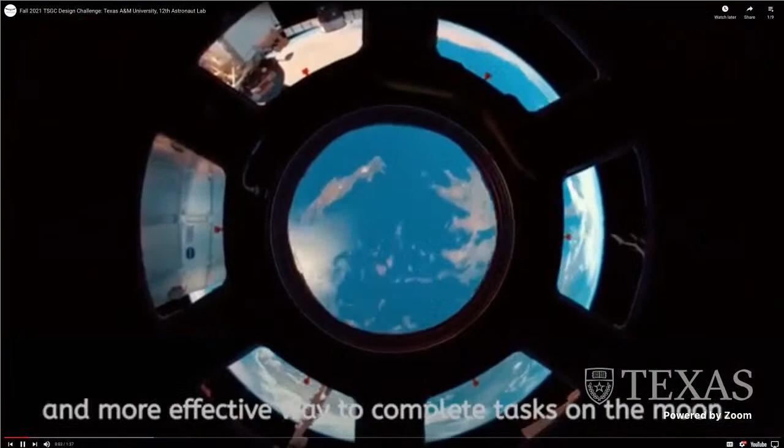Future Artemis astronauts are going to require a safer and more effective way to complete tasks on the moon. To address this, NASA issued the NASA Suits Challenge, encouraging students to improve astronaut extravehicular communication with augmented reality.

The 12th Astronaut Lab aims to develop and optimize a user interface that can be integrated into the extravehicular mobility unit of astronauts. Working with Microsoft HoloLens and Unity Game Engine, our team aims to bridge VR and AR technology in order to establish an alternative means of communication between intravehicular and extravehicular astronauts.

Our solution to the NASA Suits Challenge is Scout, an augmented reality assistant with an elegant user interface, navigation capabilities, a science sampling system, and the Telepresence Whiteboard.

Scout consists of floating hologram panels that display key vitals, task checklists, and settings to change font size, color, transparency, and feel of the system, which are all easily accessible via our main menu.

Scout provides an augmented reality compass and virtual markers to safely guide the extravehicular astronaut to points of interest. Lunarpedia serves as a virtual science sampling logbook, which the astronaut can use to save pictures and notes about anything that they find while in the field.

The Telepresence Whiteboard allows mission control and intravehicular astronauts to spawn holograms and drawings directly in the extravehicular astronaut's field of view, allowing for more interactive communications.

Lastly, our team is developing a robotic assistant to aid the extravehicular astronaut in reconnaissance by mapping out the upcoming terrain and sensing major obstacles or hazards. We are NASA Space Grant!

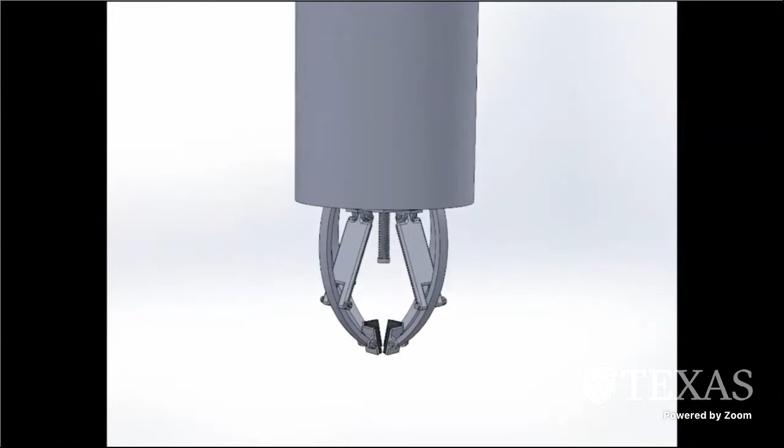The anchoring device has to comply with multiple criteria and constraints to qualify for the challenge, the most crucial being completely mechanically powered and the ability to produce 10 pounds of holding strength. In order to properly aid in EVA operations, the device itself must be lightweight and small enough to fit inside a cylindrical transportation device.

Once the lunar locker is removed from the container, the user can simply rotate the shaft handle counterclockwise to deploy the claw mechanism. Once a suitable location on a rock surface is found, rotating the shaft clockwise will close the claws to grip onto the rock surface.

Thank you for watching our video. We are NASA Space Grant.

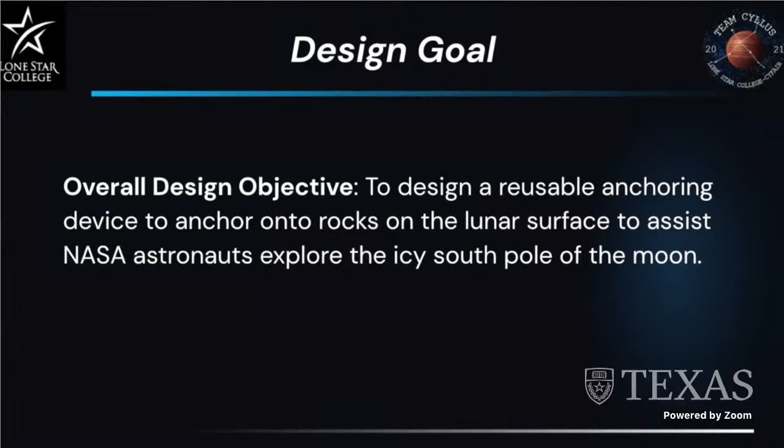The team's objective was to design a reusable lunar anchoring device for astronauts in the Artemis mission. This current prototype meets the requirement with its ability to anchor to at least a 12-inch diameter rock face while bearing angles to 90 degrees and maintaining a closing force of 10 pounds.

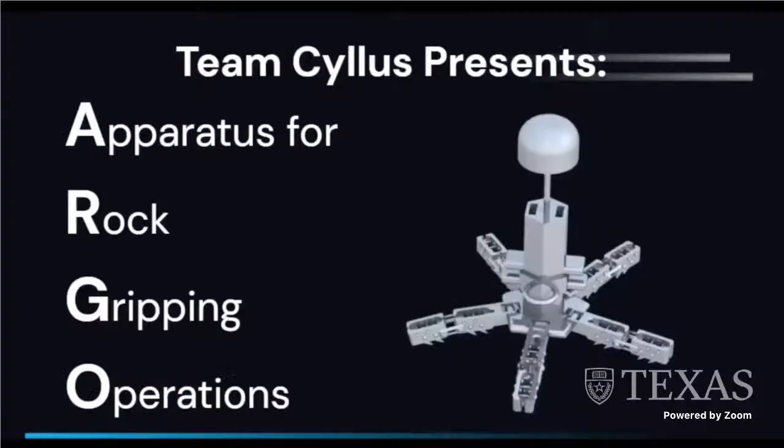In addition, it weighs 3.7 pounds, is compatible with EVA gloves, and can be manually operated with 1 or 2 hands. Argo, named for apparatus for rock gripping operations, is 17 inches tall and 5 inches in diameter. There are 5 segmented limbs with angled spines for maximum grip and hold.

Ice was a consideration in the model due to the ice exposure that would take place in the Artemis mission. The spines hook into the ice without penetrating the rock surface. In addition, the device will utilize a cable connected to the outermost end of the limbs and exert a contracting force which will curl the limbs inwards, much like the end of a finger, to anchor them to the rock.

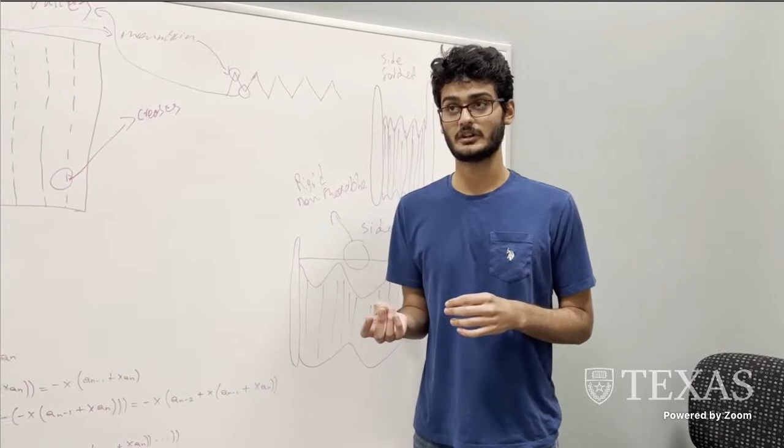Since the dawn of the space age, mass and volume has always been an obstacle to overcome in space exploration. As a team, we made our primary objective to optimize our design with mass and volume in mind to reduce mission costs. We did this with the art of origami, an ancient art that in recent years has been utilized as a vital tool in engineering and design. With origami, we designed a bed frame that is not only lightweight, but is incredibly strong, easily assembled, and mass producible. Starting with the first iteration of our design, we implemented the Miura-ori folding pattern into a small sheet of paper, and the structure could actually, surprisingly, hold a tremendous amount of weight compared to its own.

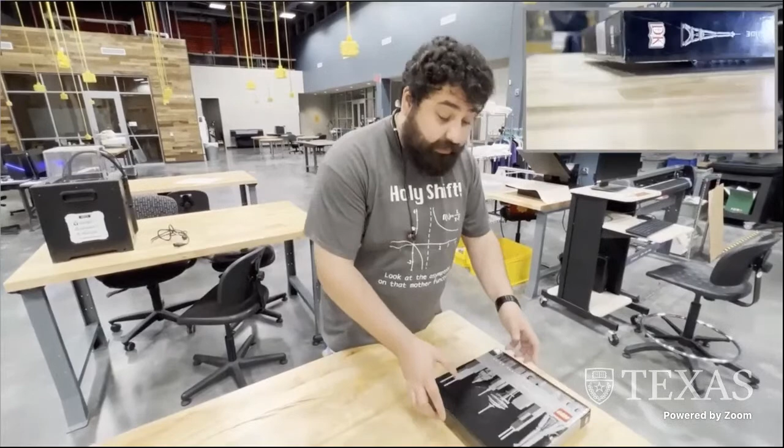We moved up to a scaled-up model version of the same pattern on the same material paper to understand all the complexity of this folding pattern, which we then implemented into our first prototype, built with the desired materials. Based on our prototype, we made several iterations for our testing phase. The calculated threshold was 40 kilograms, or 400 newtons.

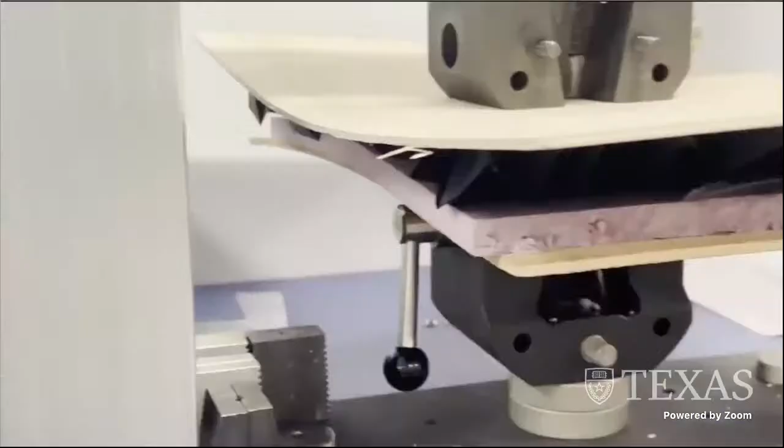We are NASA Space Grant.

Hello everyone, my name is Juan Pablo and we are Houston Engineering Center Group 5. I'm going to present the Vehicle Interchangeable Electronic Network System. Our design uses Arduino for all controllers, because it's easy to use, accessible, and affordable. The project simulates 4 vehicle applications: light, temperature, air pressure, and 3-axis acceleration. Each application has an LED to display the status.

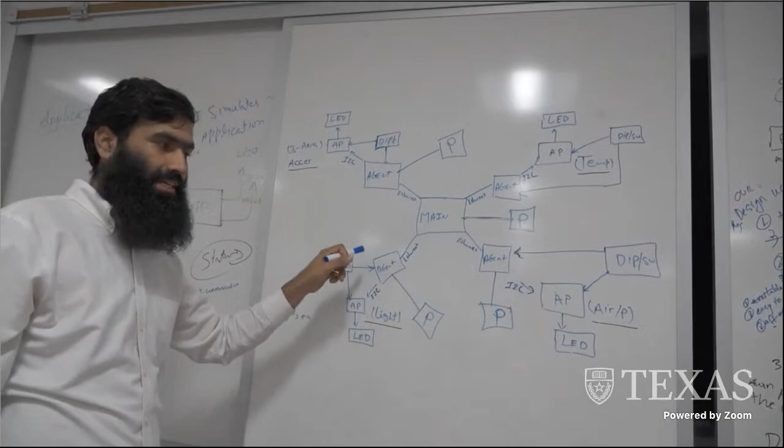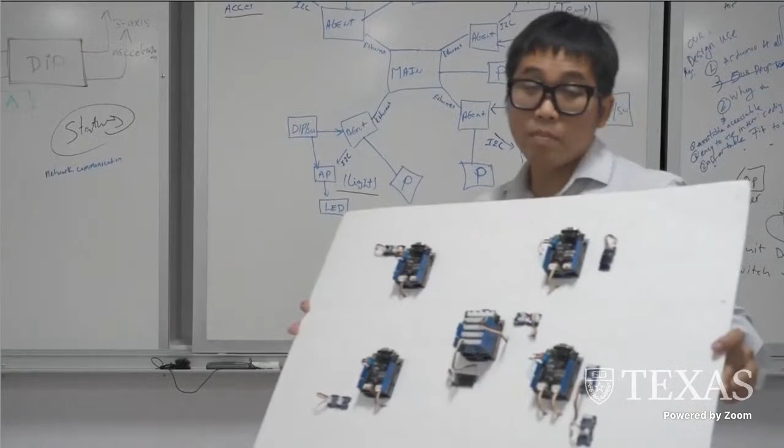For our design, we use a common connection for all units receiving power. A common 9-volt battery can power the controller. We made a backup for the network system: if one of the controllers fails, any other controller can replace it and behave according to the position. This is our design proof of concept. Our future plan is to make it fully functional and efficient. We believe this will be the best fit for the challenge.

We are NASA Space Grant.

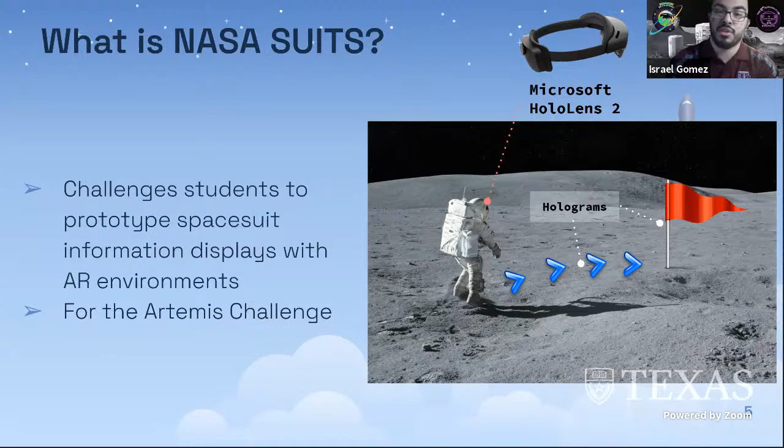Our solution to the NASA SUITS challenge is Scout. Looking at this design overview, Scout is designed into two main parts: our AR assistant and our robotic assistant. Scout's AR assistant informatics will display science instructions, vitals, terrain, and navigation instructions, which can all be manipulated in real time.

Scout's robotic assistant serves as a reconnaissance robot that creates a mesh of upcoming terrain via a LiDAR sensor in order to identify hazards and obstacles and route the best way to certain objectives. All of this is displayed and communicated via Microsoft HoloLens 2.

The mobile robot assistant is a telerobot that will aid the EVA crew member in navigation, reconnaissance, and science sampling. Our robot base is built off of a Yahboom G1 AI Vision Smart Tank robot, which features continuous tracks, Raspberry Pi, and real-time video transmission.

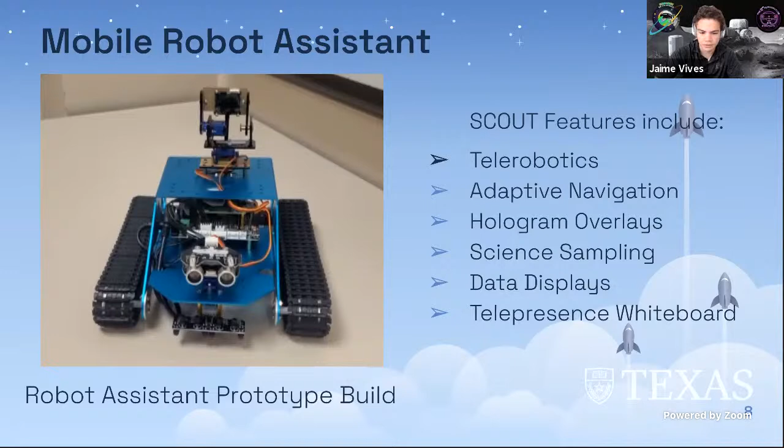The robot can explore dangerous areas and assist in search and rescue. Video feed can be supplied to mission control for better personnel support.

To further assist with navigation, we've created an adaptive navigation system, which involves the use of machine learning through Unity's ML agents. First, the surface normals are identified from the camera, and the crater boundaries are retrieved from a database, which are both input into the neural network for the agents to use. Then the agents utilize this data to create a suitable path to the current objective.

As seen in the video, the agents, marked in blue, are exploring the virtual lunar landscape and gathering data in order to provide a database for avoiding hazards, marked in red. Once the agents are sufficiently trained, they can be deployed to help assist in avoiding hazards and create a more efficient and safe path.

Another component implemented is our UI compass, and it interacts with its pointer to display the location of interest, such as a rover or lander, in relation to the EV crew member. The name and distance of the object is displayed overhead. The points rotate to indicate the appropriate direction of the waypoints.

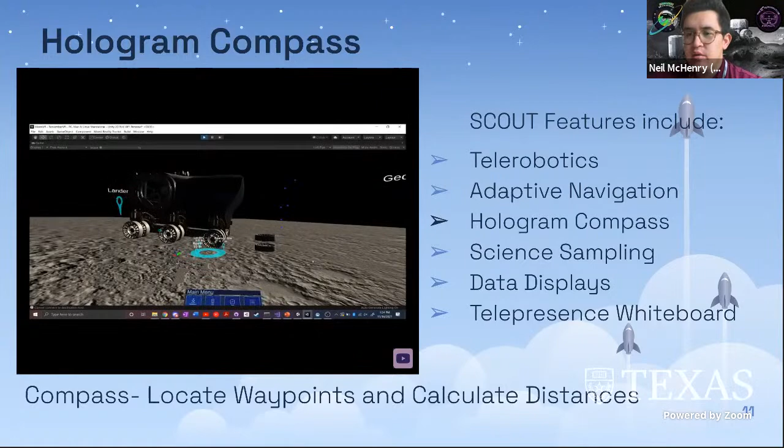As seen in the video, the user is selecting waypoints from the navigation menu to display on the compass. These markers can be set by the EVA or IVA crew members before and during the spacewalk. This compass serves to provide a sense of spatial awareness in bare environments such as the lunar landscape.

A feature we have for field note-taking is the Lunarpedia. The Lunarpedia note-taking system is used to create, store, and recall entry logs. The user can create an entry, add a picture and description using voice logs, and store its location as a spatial anchor, as shown in the top photo.

The Scout Assistant takes care of real-time voice transcription using the Azure Cognitive Services framework. Once the user saves the log, it is saved as an object in the Azure Blob Storage resource.

The user can also display and edit any previously created log and location, and the photo and description will be updated in the cloud storage, shown in the bottom photo.

Our user interface design features circular consumable level indicators that are updated in real time based on the telemetry provided by the spacesuit. It also has a Lunarpedia, which again can be used to record voice logs and catalog pictures of science samples and points of interest found in the field.

Our radial menu makes it easy to access any UI elements quickly through eye tracking and hand gestures. And lastly, the 3D Terrain Minimap provides a visual of nearby waypoints, crew members, locations, and hazards.

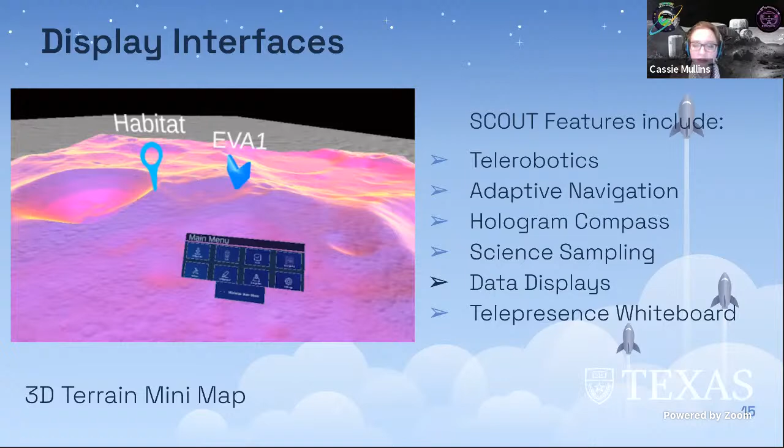Here is the Telepresence Whiteboard. The video on the left shows the view from the remote user or mission control. The video on the right is the view from the HoloLens 2 user, or the astronaut.

The remote user can see the scene that the astronaut is in using the LiDAR scan data. The position of the astronaut is indicated by the VR headset. The position of the remote user is indicated by the Scout AR Assistant icon, which looks like a Shiba Inu.

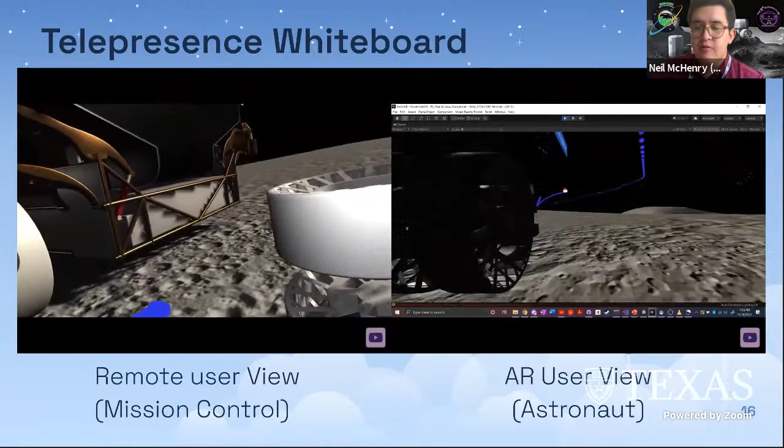Using the Photon server library for networking, the remote user can guide the EV crew member using the spline pen to draw on the EV crew member's field of view, as you can see with the blue drawings in the video. The remote user can also speak to the EV crew member.

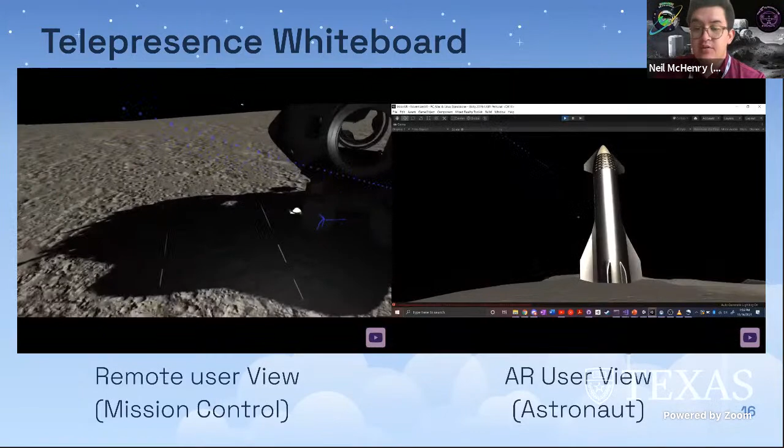Scout AR Assistant can suggest in real time to the astronaut crew member different recommendations of where to go and what to look at. Scout can also listen to and interpret voice commands from the crew member to change the UI display.

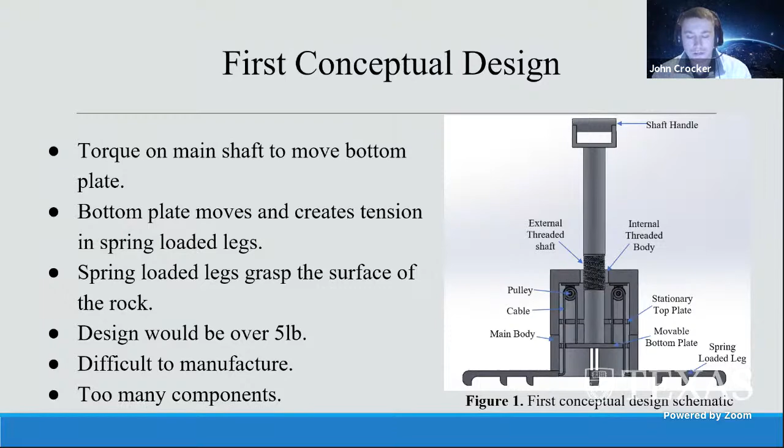Thank you, John. For our second design concept, we had the opportunity to attend a MicroG information session. During that session, it was described that the device itself could be used to grab onto the rock as if to lift it, instead of utilizing the face of the rock surface as seen in our first conceptual design. In the second conceptual design, it is still powered by torquing a threaded shaft component, and it allows a lead screw to traverse the shaft.

The idea for this concept is that the threads are self-locking, or potentially adding an additional locking mechanism so there's no back driving of the threads when it is locked onto the rock surface we're trying to attach to. I'm now going to pass it on to Bun to discuss our decision matrix.

Thank you, Hudson. In order to select the best conceptual design, a decision matrix was utilized to highlight the strengths of each specific concept design. NASA's InSight Mars lander space claw was used as a datum to compare with the given design concepts. Going through the matrix, it is shown that the second conceptual design was rated higher than the first conceptual design with the given criteria. With this breakdown, it was estimated that the second concept would be the better design moving forward.

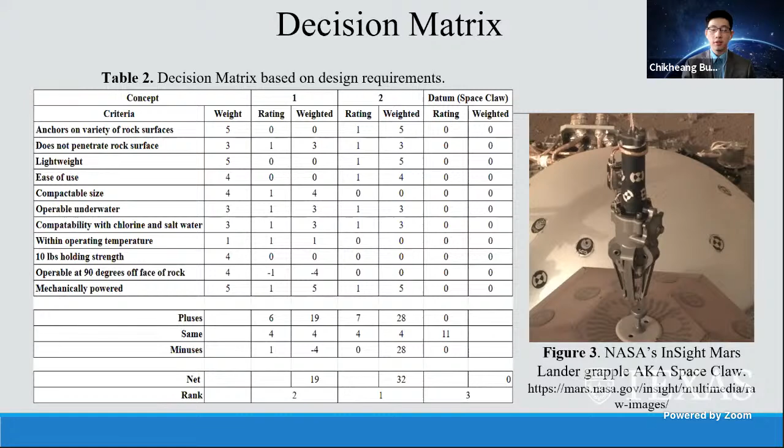Now I'm going to pass it to Hudson for the final design concept. Thank you, Bun. So our final design concept still utilizes the lead screw to generate linear motion, as previously shown in our second design concept. The lead screw is flanged to a bottom plate that will allow the legs of the claw device to open and close based on the linear motion of that lead screw.

The bottom of the claws have a rubber footing that will ensure there's no penetration and a strong grip can be achieved on the rock surface. The design shown is mostly based on the Micro-G Next design challenge, and it will potentially be tested in the neutral buoyancy lab, but there have been some considerations for use on the lunar surface, such as a rubber seal to protect the thread interface surface from any lunar dust.

I will now pass it on to John to discuss the material selection for our design. Material selection for our final conceptual design consists of 4 main materials: 6061 T6 aluminum, 304 stainless steel, 316 stainless steel, and nitrile rubber. The aluminum was chosen for the main components listed in Table 3, such as the strut, leg components, bottom plate, and stability handle.

The 304 stainless steel was chosen for the lead screw and threaded shaft, along with 316 stainless steel for the fasteners and strut hinge. Finally, nitrile rubber was chosen for the claw foot.

Nitrile rubber was chosen for the claw foot mostly because it has excellent abrasion resistance. Since lunar rocks are very porous, we didn't want our bottom material to break off, so we needed really good tearing resistance as well. We chose 6061 T6 aluminum for its strength to weight ratio, its corrosion resistance, and its rigidity for our design.

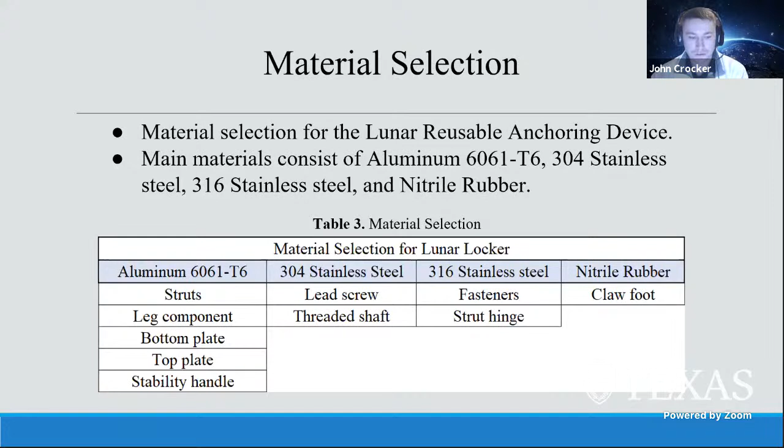For the material weight, the total weight for all components is listed in Table 4. Each component, its quantity, and its corresponding total weight can be seen. The total weight for all the components needed for our design was around 4.924 pounds. The total weight was evaluated using SolidWorks mass properties for each material and its corresponding component.

The total weight for all the components is cutting it close to the 5-pound constraint, so further building and prototyping will be necessary to ensure the device is within the constraints for Micro-G Next. I'm going to pass it to Hudson Hill for the clamp and thread analysis.

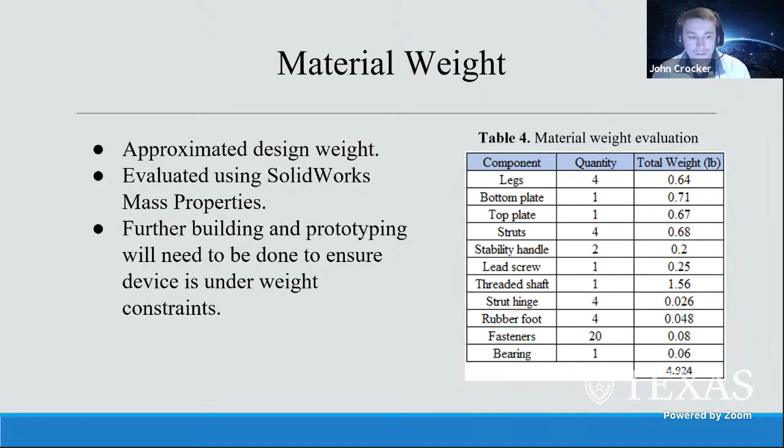So the first bit of analysis that was performed was to see how much force was required to generate the 10 pounds of holding strength needed for the claw device. This was done using MathCAD, and the calculations show that each leg is subjected to around 11 pounds of force.

This value can then be used in finite element analysis to ensure the structure of the device can be strong enough to withstand the desired holding strength, and this analysis will be performed at a later date for the structures.

The last bit of analysis was for the threads in the design. As previously stated, one of the goals is for the threads to be self-locking so we don't have to use an external braking system to hold the threads in place. The thread we chose is a 1 1/4 inch thread diameter with 4 threads per inch and 2 thread starts. A minimum friction coefficient of 0.15 for steel-on-steel thread interface was used in the analysis and shows that the threads, in fact, should be self-locking. Further testing will still be done in prototyping to ensure that these threads are self-locking and safe for the design we've chosen. I'm now going to pass on to Mustafa to discuss the project plan.

What's been done so far, as previously shown: the conceptual model has been designed and parameters have been evaluated, such as weight and material selection. Going forward, we will await Micro-G's final decision on the design selection. Should Micro-G choose our design, they will appoint us a mentor, which will help us immensely. We have to perform finite element analysis on the structural components, and we have to create our design prototype and evaluate its effectiveness. If there are any errors or issues we encounter with the prototype, or if it's not up to standard with the criteria and constraints, then we will make adjustments as necessary to produce our final working product.

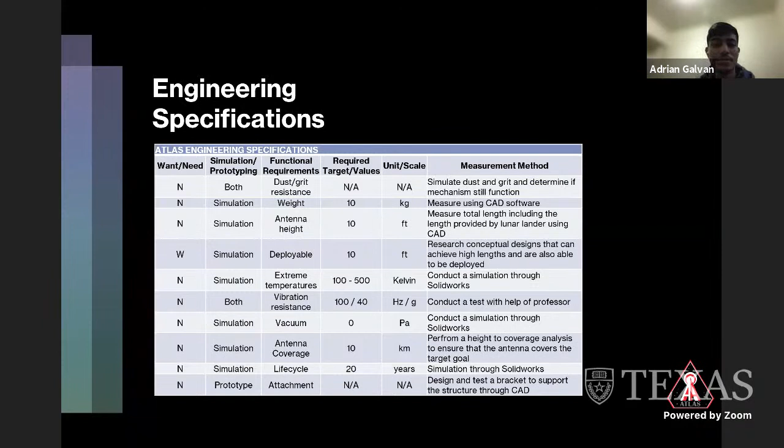Here are engineering specifications. It has some of the most important requirements we need to consider, such as weight, height, temperature, vibrations, and dust.

Going into more detail, it is expensive to send structures into space. It costs up to $1 million per kilogram to send something into space, according to our mentor. For this reason, we want to keep our weight to a minimum. Our team aims to keep the total weight under 10 kilograms.

Another thing to consider is the extreme temperatures on the moon poles. The temperatures there range from negative 280 degrees to positive 260 degrees Fahrenheit. So we need to pick a material that could withstand these temperatures.

In addition to extreme temperatures, we must consider significant vibrations that could affect the structure during launch and landing of the lunar lander. Therefore, our design needs to have the structural integrity to withstand these vibrations.

How we would attach the antenna bracket to the Nova-C was also considered. The Nova-C has a solar panel structure on top, so we determined that we would need to attach our structure on the side panels.

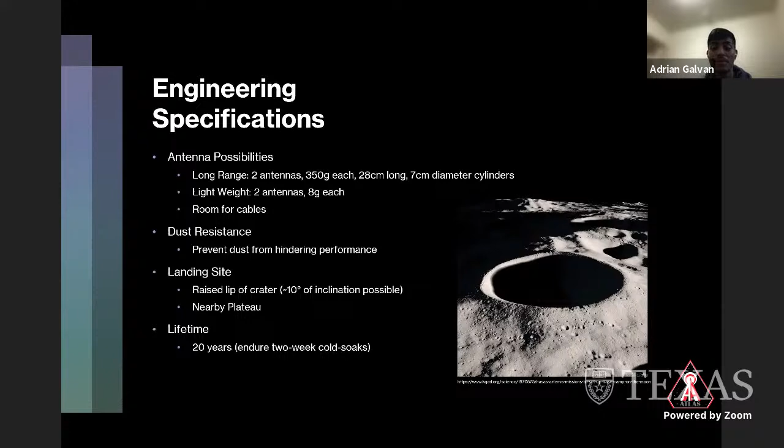Moreover, the landing site will be in a raised lip of a crater, and there's a possibility that the lander lands on a 10-degree incline, so a mechanism is needed to adjust the antenna if the lander does not land straight. Finally, we will need to accommodate for a 20-year lifespan and endure 2-week cold soaks.

For our conceptual designs, we came up with 3 deployable variations: a telescoping boom, a composite boom, and a triangular truss. The telescoping boom is composed of multiple hollow tube sections that are initially stowed and deployed one at a time. This is done by an electric motor that sets a system of pulleys in motion. This concept provides great structural integrity.

Then there's the deployable composite boom that is very much like a measuring tape and is made out of composite materials. The boom contains strips that are either glued or welded together and shaped in the form of a cylinder.

The motor and boom are housed in the same space that leads to a tubular opening from which the boom deploys. Lastly, we have the deployable triangular truss, which consists of metallic wires that uncoil from the base of the structure by a motor and turntable. This design offers a compact storage volume that occupies less than 50% of the total deployed length. Since it's foldable, the joints have multiple degrees of freedom, while the truss structure offers structural support.

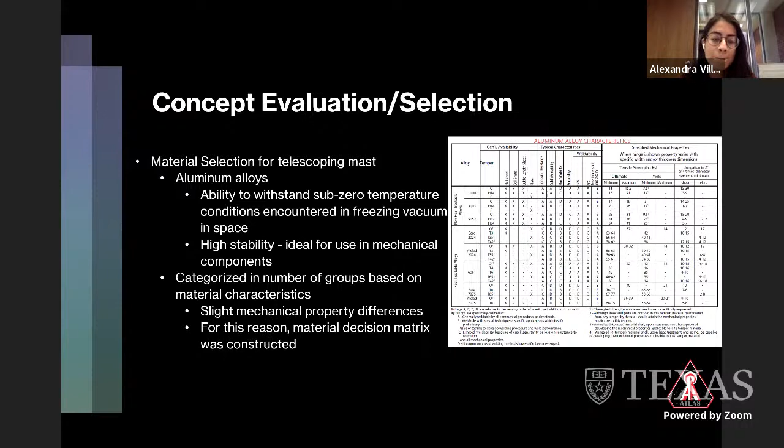The pulley system is how the mast is going to get to its deployed position. We studied countless other deployable masts of all types and came up with this simple lightweight option that gets the mast to its desired height. A force analysis yielded a torque value of 0.48 Newton meters for our motor, and the Nippon Pulse stepper motor met our criteria.

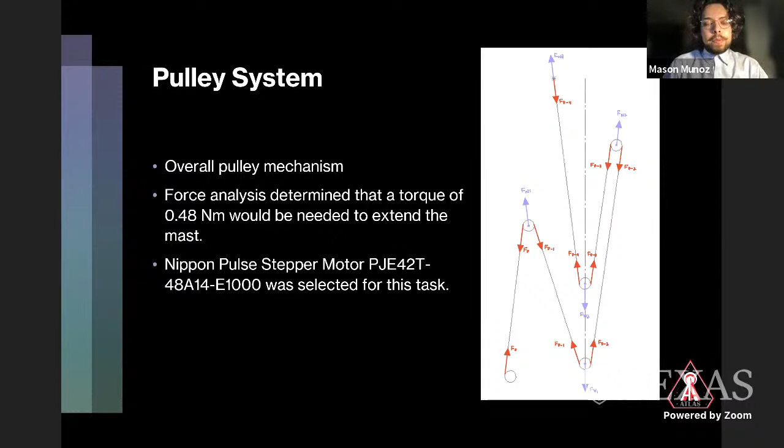A preliminary radio link design was performed with the help of our mentor to determine a rough estimate of the required antenna EIRP for varying tower heights. While our antennas were roughly picked out for us, this model may be useful in the future to determine other alternatives.

Mr. Lansdowne also helped us pick out a suitable cable by comparing their masses and insertion losses. From his research, the UFJ 205A and UFJ 185A were both good candidates to use. The cable selection is important in our project in determining the maximum range of the antenna, as well as a more accurate load for the buckling simulation, as we'll see in the future.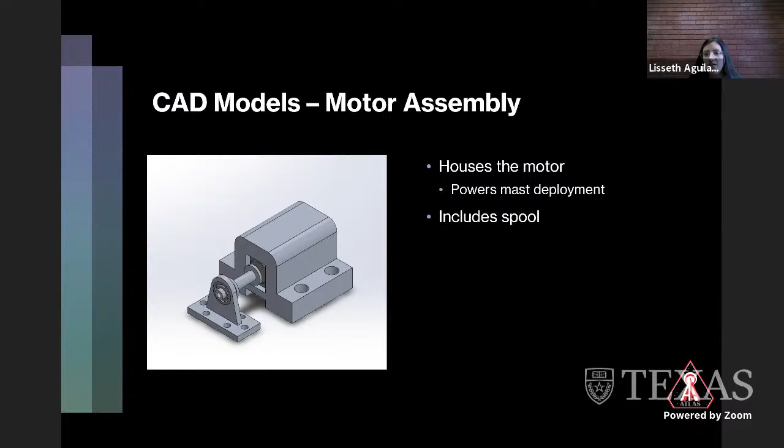In order to make sure the structure would be able to withstand the top load, we conducted a buckling simulation using gravity and an estimated weight of the antenna and an auto-adjusting mechanism we're planning on doing as the loads. The following results were obtained, and since the load factor is considerably larger than 1, the mast will not buckle.

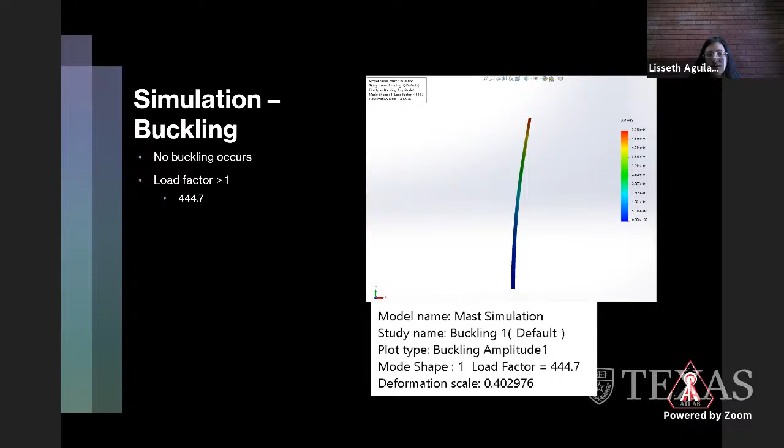Some potential obstacles that may be faced when landing include an uneven landing and abrasive lunar dust. Fortunately, the Nova C lander has an approximate 10-degree tilt recovery, but in order to maximize the antenna range and efficiency, we plan on adding a gimbal at the top of the antenna mast for stabilization. Furthermore, in order for the deployable structure to be free of lunar dust, we have added a casing around the mast, and we will design a lid on the top.

In the foreseeable future, we plan to prepare our CAD models for manufacturing, then building and testing our prototypes. Our prototypes will be made of the selected material, aluminum 6061, and we will perform vibration tests. Finally, we will design and program both the gimbal and lid to deploy once landed.

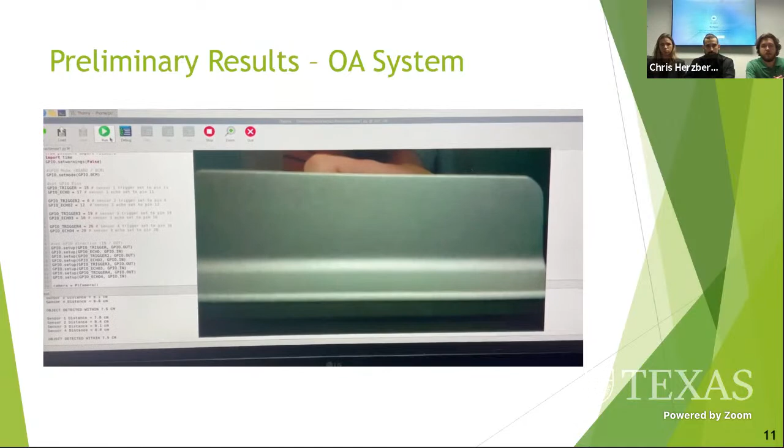When the object is reaching a little bit closer, within that 7.5 centimeters, the message has been given multiple times. It's just showing the object moving a little bit further away, not displaying those alerts anymore.

Starting next semester, we plan to have everything completed as far as the individual systems are concerned. We will begin integrating all the systems together, and then we will start our machine learning, and we hope to have that completed by March 24th, giving us some wiggle room to troubleshoot and handle any issues that may come up, and be done by May 7th.

In conclusion, the progress so far: all our diagrams and documents have been drafted and completed. The system's GUI has been designed and coded. All of our parts have been received, and we're in the progress of putting them all together. The only things we have left after that are to integrate the systems and begin the actual machine learning implementation.

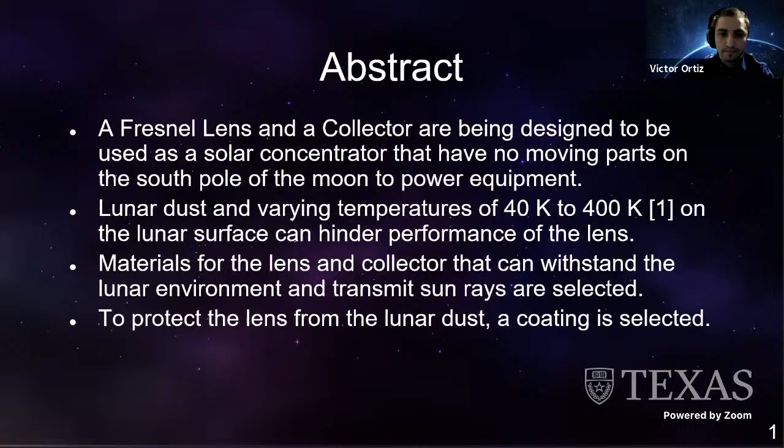For this project, the teams involved are Team Hyperion, whose roles are to design the dimensions of the lenses and collectors, simulate the lenses and collectors for optical and thermosolar flux in both lunar and Earth environments, and test prototypes for optical solar flux to validate the simulation. For Team Solis: material and coating selection for lenses and collectors, fabrication of lenses and collectors, fabricate the testing bench, and test prototype for thermosolar flux to validate the simulation.

This design is ideal to be placed on the lunar surface to concentrate solar energy. However, to simplify this process in simulation and prototyping analysis, the design is to only have a 30-degree revolve piece of the lens. This will allow the simulation to run at optimal levels while also allowing for prototyping of the lens within the means of our manufacturing capabilities.

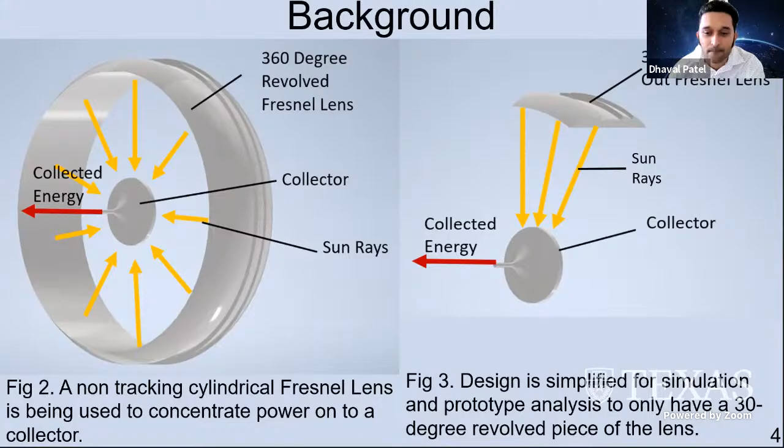For our objectives, Team Solis will go through the following: material and coating selection that can withstand the lunar environment, fabrication of lenses and collectors by producing two sets of two lenses and a collector from selected materials. Afterwards, polish all the lenses and collectors that have been fabricated, and then apply a selected coating to one lens from each material set. The next objective is to fabricate a testing bench that can hold both the lens and collector in position to mimic the simulation.

For our specifications, the first is a melting point of selected lenses and collectors that will need to be at least 400 degrees Kelvin due to the high temperatures of the moon. Furthermore, the material of the lens and collector must have a refractive index close to 1.4 to collect most of the sunlight, and it is imperative that the materials have a high transmittance factor of at least 80%, since the sunlight needs to be transmitted to create energy. Finally, the design of the lens and collector must withstand at least 9 Gs to survive a rocket launch. Similarly, our coating will also need to have the same melting point, transmittance, and refractive index criteria.

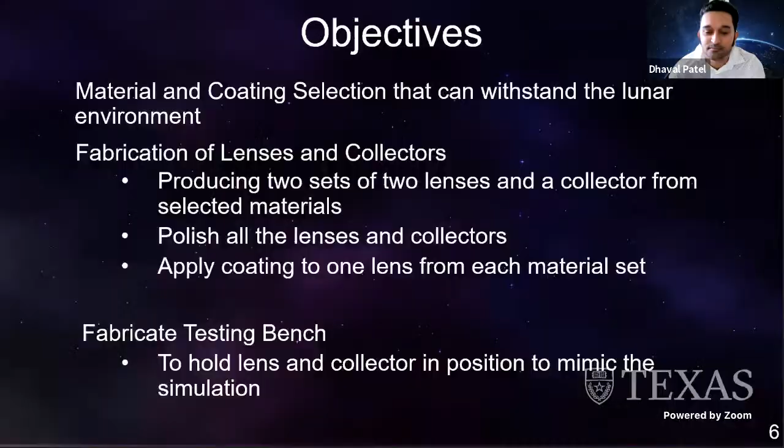These were chosen based on refractive index, transmittance, melting point, as well as availability and manufacturability. The lens will need a coating to protect from abrasive lunar dust, which will degrade the lens and decrease optical performance. Our team researched and compiled a list of coatings that meet the criteria mentioned earlier.

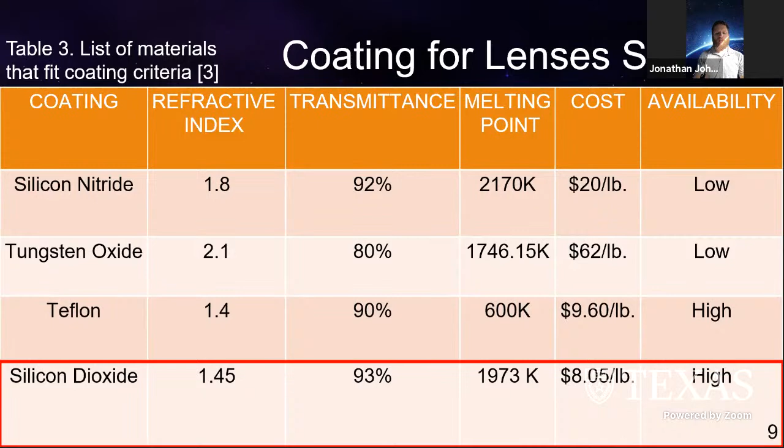We chose silicon dioxide due to being able to be simulated in Optica EM, its market availability, and being able to process it safely. For our fabrication method, we chose to machine our lenses and collectors. A 2-inch thick sheet of polycarbonate and PMMA were selected, thick enough for our prescribed dimensions of lenses and collectors to be produced.

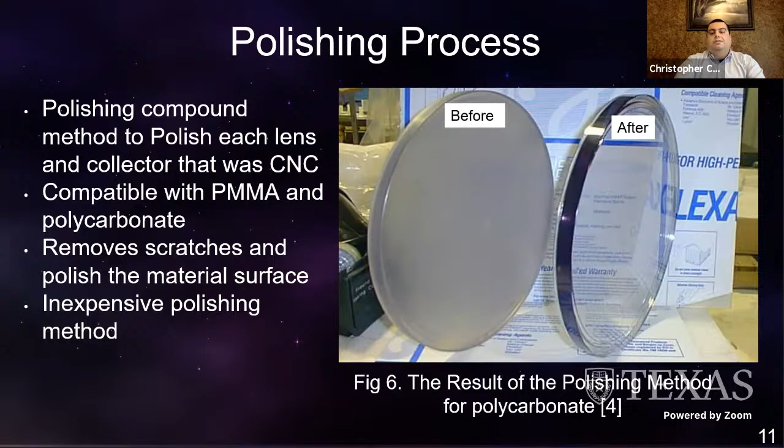After the CNC process, the lenses and collector will need to be polished. This is to ensure there are no scratches or imperfections from the CNC machine process that can interfere with the clarity and light transmissibility when testing both lenses and collector. Therefore, a paste compound polishing method is being chosen since it can be applied to both PMMA and polycarbonate materials, increasing surface finish and smoothness as shown in the figure.

We have designed a test bench that mimics the simulation in terms of position for the lenses and collectors, where light will pass through the lens and focus on the collector. The test bench has a revolving shade that shields the collector from ambient light, which eliminates a factor when assessing the lens's performance.

The test bench has a pivot armature that can raise and lower the lens to have its focal point line up with the collector's center. The pivot armature also rotates with the cylindrical shade to point the lens towards the sun.

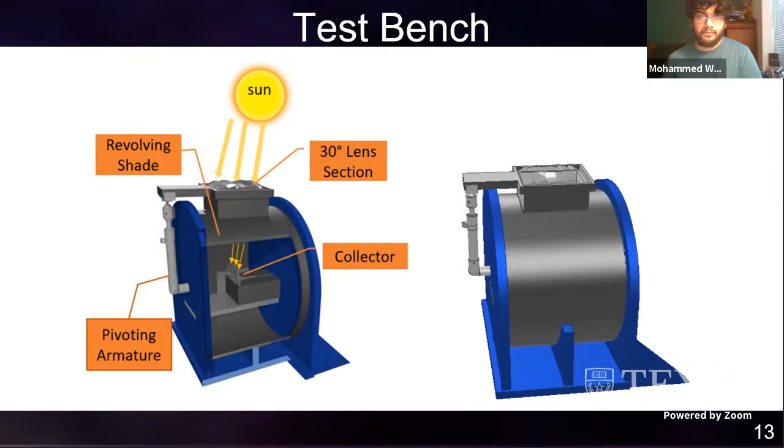This is the bill of materials for our fabrication of the lenses and collectors and testing bench components, as well as the safety wear we will use when conducting our testing.

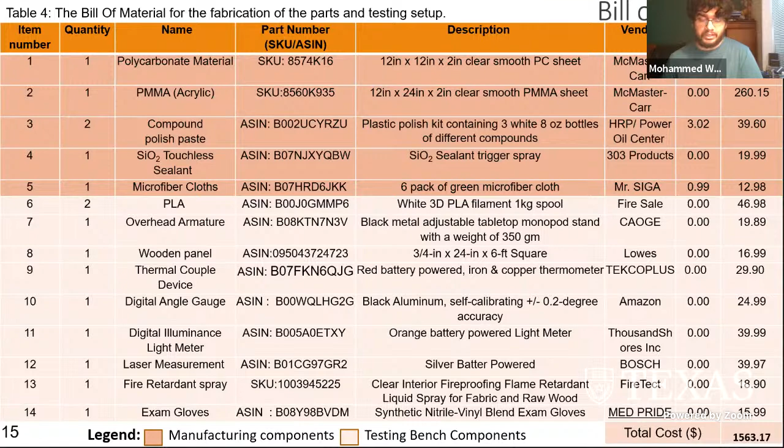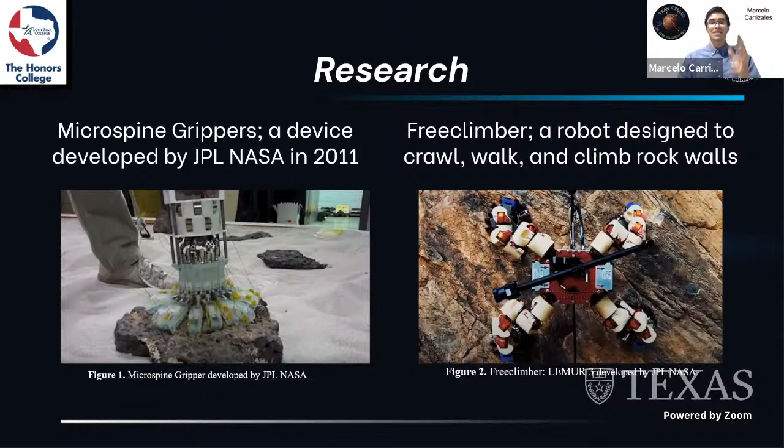Moreover, Team Silas has also looked at the Freeclimber Lemur 3, also designed by NASA and utilized for terrain exploration, which uses a similar gripping mechanism to the Microspine Gripper. With its thousands of hooks, it latches onto the rough surfaces of rocks. Team Silas is drawing inspiration from this design technology to create an anchoring device which is easily portable in size and weight while maintaining or even improving its efficiency. Next slide please.

Through the engineering design process, Team Silas has addressed the design criteria provided by NASA Micro-G throughout development. Team Silas seeks to develop a device which is adaptable to different rock types, cannot penetrate the surfaces of the rocks but can mildly scratch them, and is operable with one or two gloved hands.

The device must have a 10-pound holding force and a dry weight of less than 5 pounds earth weight. It must also be adaptable to icy surfaces since the lunar temperature creates an icy layer around the rocks. The device must be storable within a 6-inch diameter by 18-inch high cylinder, and we will address minimizing pinch points as much as possible.

Thank you, Marcelo. After reviewing our research and the design criteria based on NASA requirements, the team proceeded to come up with preliminary designs. We came up with Grabber and Argo, which stands for Apparatus for Rock Gripping Operations.

Structurally, the two designs are very similar in two ways. One, both designs have segmented limbs which help with extending or contracting and grabbing onto rocks of many surface types. In addition, the limbs have microspines which help strengthen the gripping onto the rock. The designs, however, are different mechanically.

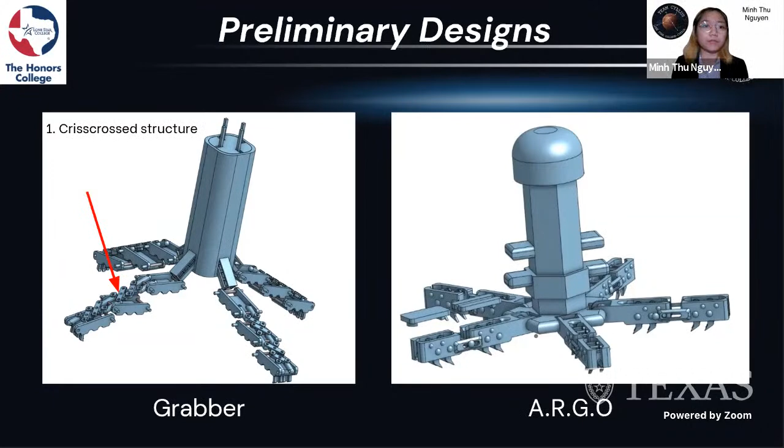Grabber relies solely on crisscross structures located on its limb to be fully functional. Argo, on the other hand, has a cable system as well as torsion springs that significantly help with applying force, grabbing, and gripping onto rocks. Later in this presentation, we will show a better view of the cable system and torsion spring to give a better idea of our design.

After coming up with the preliminary designs, the team compared our designs to select the one we would like to continue working and improving on. Since the Microspine Gripper was a design we drew inspiration from, we decided to use it as our datum and compare Grabber and Argo against it.

In terms of anchoring ability and holding strength, Grabber underperformed compared to our datum. Argo, on the other hand, meets and exceeds the features of our datum and earned a much higher score compared to Grabber. Therefore, we decided to move forward with Argo.

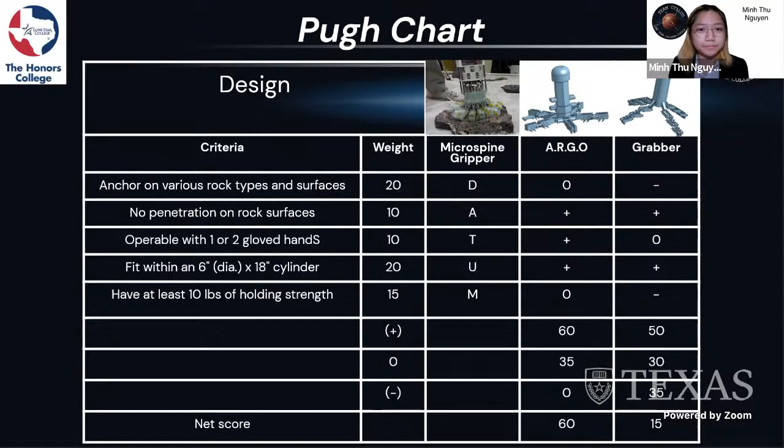The Argo design is a compact lunar anchoring device weighing 3.7 pounds as calculated by our SolidWorks software. It is 17 inches high and 5 inches in diameter in its resting position, reaching a maximum of 13 inches in diameter when being operated.

The design consists of 5 segmental limbs kept in constant downward force through the use of torsion springs at the base of each limb. The limbs will be raised to their anchoring position by compressing the handles of the outer ring and central ring together. Each limb segment contains 4 independently actuated spines designed to lodge into defects on the rock surface with only mild scratching, which is allowed per the Micro-G challenge.

This is a better image of the cable system along with our torsion springs. The spines are locked in place with force provided by a linear ratcheting system connected to a cable system going from the outermost segment of the limbs into the bottom of the central housing.

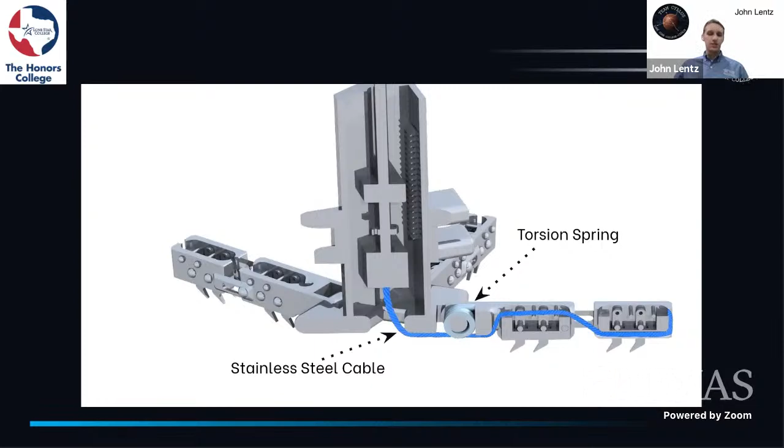The tension will be kept on the limbs as the astronaut extends the topmost handle upward, contracting the cables going through the system, providing a gripping force much like the end of a finger.

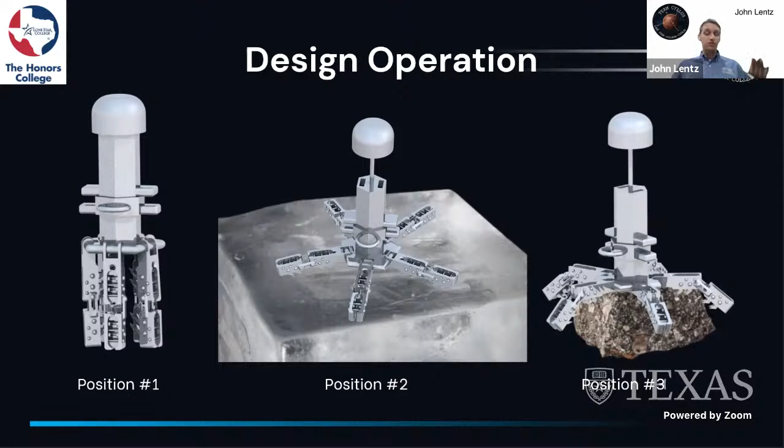On the left is the Argo device in its resting position. To operate the device, the handles of the central housing and outer ring are compressed, raising the limbs against the downward portion of torsion springs, resulting in the middle image. The device is then placed against the rock surface, and the limbs are released from their holding position, contouring to the surface. After which the handle on top of the device is extended, contracting the cable system, causing the spines and limbs to grip the surface, allowing the device to anchor onto both flat and curved icy surfaces.

The team has made a small-scale mock-up of the Argo design to test proof of concept. By designing the smaller scaled mock-up, the team gained a stronger understanding of how the limbs should interact in the model and visualized the cable system within this design. This mock-up has given the team insight into how the Argo design could be multifunctional for picking up smaller rocks on the lunar surface.

Did I just cut out? Sorry. I'm sorry, here we go.

This mockup has given the team insight into how the Argo design could be multifunctional for picking up smaller rocks on the lunar surface in addition to anchoring, exceeding the requirements given by NASA. Moving forward, the team will be 3D printing several prototypes for reiterations to improve the design. The team will be addressing in future work the possibility of pinch points and dust tolerance. The material we have chosen to manufacture the device out of will be aluminum 6061 for the body and stainless steel for the cable.

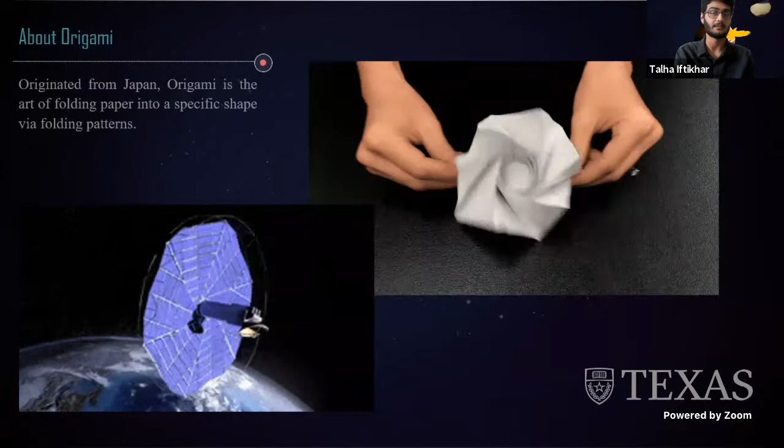Now, a little bit about origami. Origami is the Japanese art of folding paper into decorative shapes and figures. Depending on the folding patterns or the material used, structures can be folded to deploy automatically or form rigid columns that can support mass. In recent years, origami has had many applications in engineering and design. Its folding capabilities have been utilized by NASA in space exploration, such as in satellites, and it has the capability to significantly reduce volume and mass consumption.

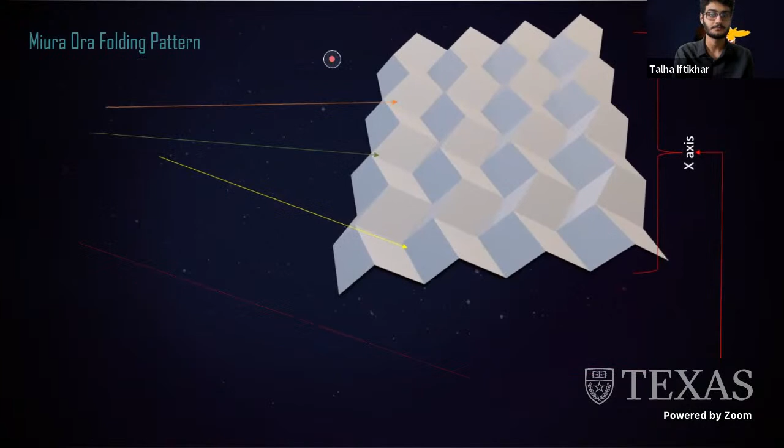The Bedogami design utilizes the Miura-Ori folding pattern for its structural stability, a pattern invented by Japanese astrophysicist Koryo Miura. The team chose this pattern due to it utilizing parallelograms to form the tessellation of the forms, making it a rigid origami mainly comprised of alternating mountain and valley folds. The simplicity of this folding pattern allows for assembly in a single motion, therefore reducing the amount of manufacturing parts to only a single foldable structure.

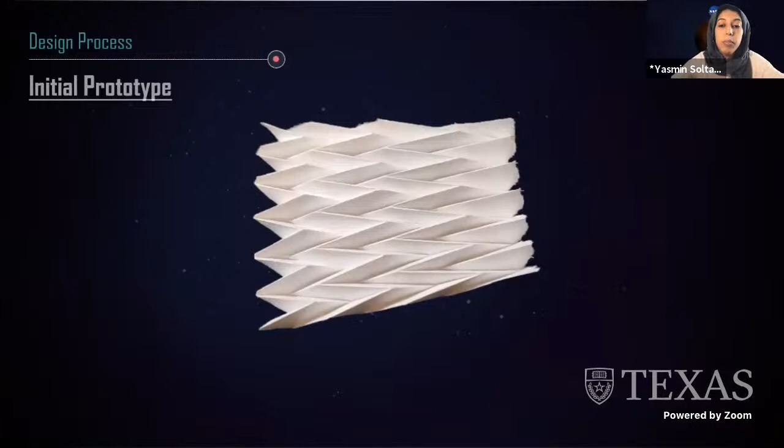The first folding the team made using the Miura pattern was made on a regular sheet of paper, which turned out to be extremely resistant and capable of holding a calculus book of over 1,300 pages. The team then moved to develop an upscale prototype of paper, which was essential to gain familiarity with the folding process. Once they acquired better knowledge of folding and origami from the upscale version, the team proceeded to apply the folding onto the desired materials, leading to a final prototype made of heavy weighted paper of 49 grams, which was then used for the testing process.

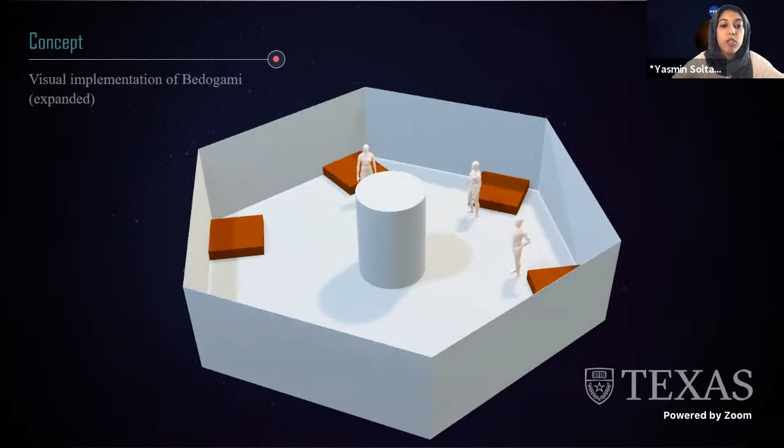This is a visualization of how the Bedogami would look once expanded. And this is a visual representation of how the Bedogami looks when contracted.

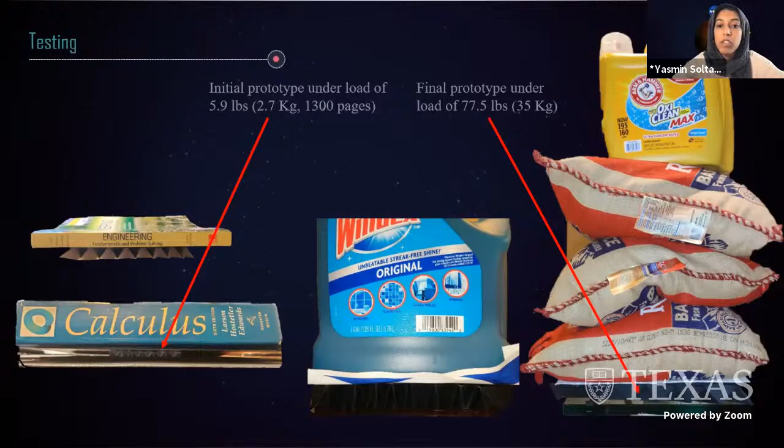Throughout the development of the Bedogami, the team conducted several strength tests on each prototype using mass objects ranging from heavy textbooks to rice bags and detergent bottles, using the compressive strength test machine at the UT Tyler Mechanical Engineering Lab. To calculate the stress within the elastic limit of the origami, we use Hooke's law.

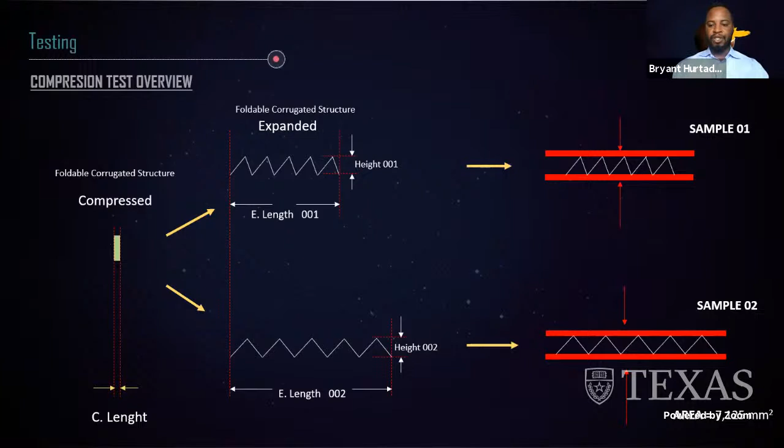We conducted 4 tests for our design, 2 for calibration and 2 for data collection. The origami structure test sample is half the size of test sample number 2, which is a full-size prototype, with the test overview shown in this diagram. In this image, we measure the total area of the mechanism compression machine.

In conducting the stress and strain curve tests, we briefly evaluated the effects of angle variation on the mechanical properties. For example, on test number 1, our raw data graph was obtained from the compression test, indicating a force of 620 newtons, with a calculated yield stress of 87,000 pascals and an elasticity of 241,000 pascals.

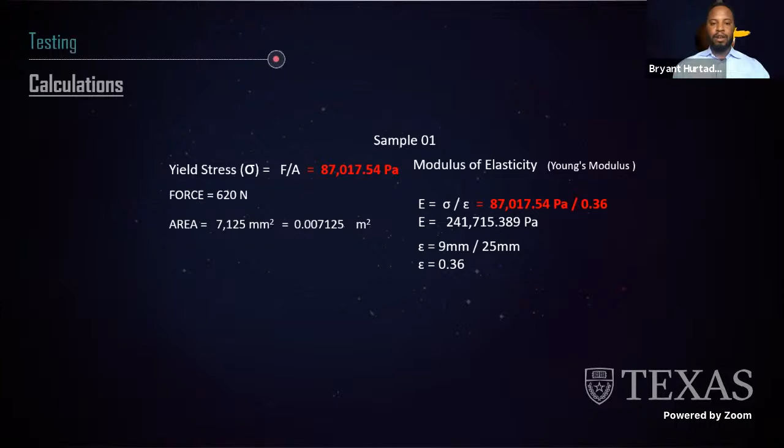We believe the future of our project to be fruitful. As we near the end of the semester, our team and fabrication personnel have already started implementing a new variant of the folding pattern, and we also plan to venture into the realm of compliant mechanisms to integrate them into our design. Our team is also working on different applications of our product, and most importantly, the concept itself, to serve the good of humankind.

Applications such as disaster-stricken areas in need of shelter and beds, and field hospitals, are just two examples where lightweight structures that are deployable from such small volumes can play a major role in emergency operations.

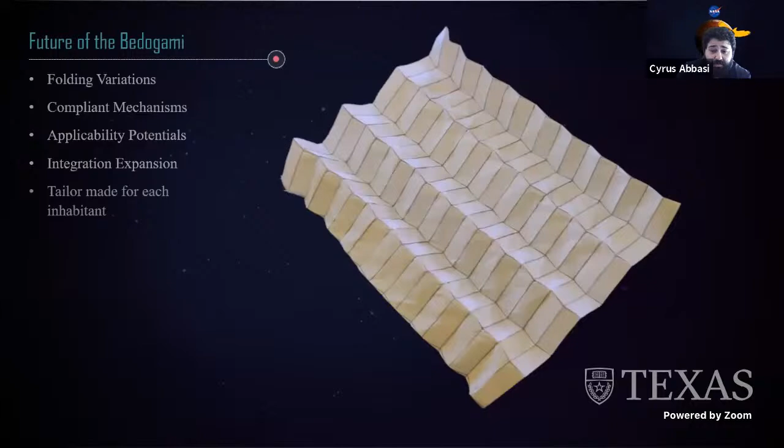This is our new variant that has 3 times the height and 3 times the load capacity compared to our very first small prototype. Just incredible.

Our project and proposed concept brings tremendous savings for future NASA missions, not only to Mars, but even for the upcoming Artemis missions.

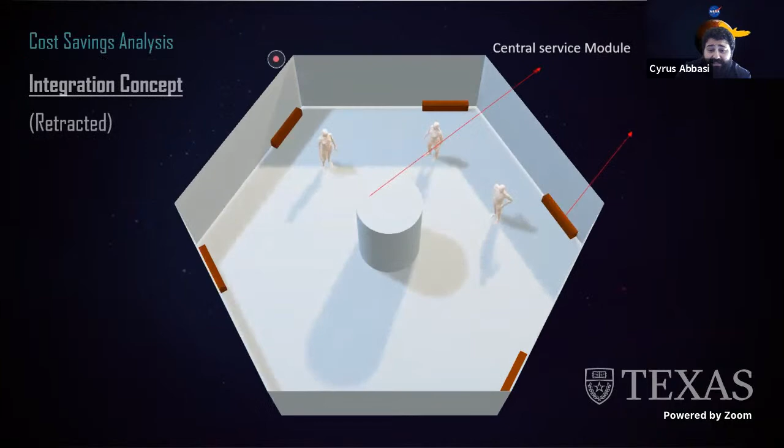We visualize the habitat quarters as seen in this concept 3D model, where we saw it best to have all HAB utilities based at a central column within the module. Usable space becomes very restricted when furniture such as beds and the HAB are not retractable, but with the implementation of origami, our design allows for twice the usable space, which can be utilized for other means.

Due to the retractable nature of our design, our beds are safer and easier to launch in the fairing of rockets, as they can be secured much better due to their lightweight and shape. This allows for transportation of more equipment in a single launch, dramatically reducing cost in both launch vehicle and module design, manufacturing time, manpower, overheads, parts, testing, certification costs, mounting, and fuel, delivering our initial proposed goal of dramatically cutting costs by means of volume and mass reduction.

We achieved all our objectives by implementing origami to reduce mass and volume, eliminating multiple launches needed to ship the excess mass originally, creating a simple design that assembles and deploys easily, and is tailored to every astronaut's physiology, to make space exploration cheaper and more accessible, feeding the explorer and pioneer nature of our species to go beyond. Thank you.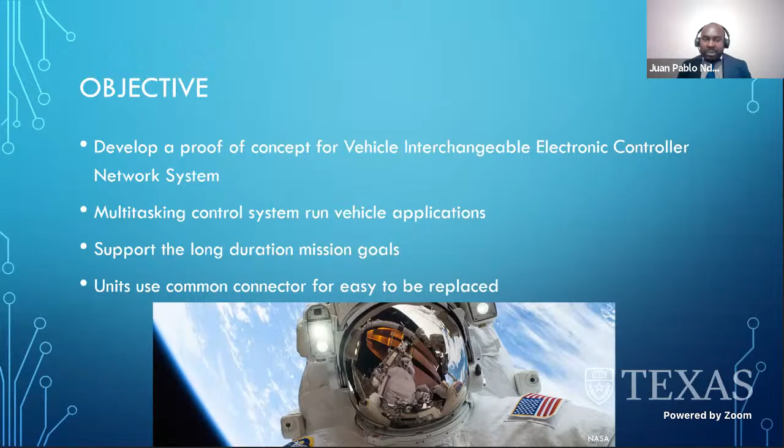Our objective is to develop a proof of concept for a vehicle interchangeable electronic controller network system that makes multitasking control systems run a vehicle application to support long duration mission goals, using common connectors for easy replacement. And the next slide will be presented by my partner Ingrid.

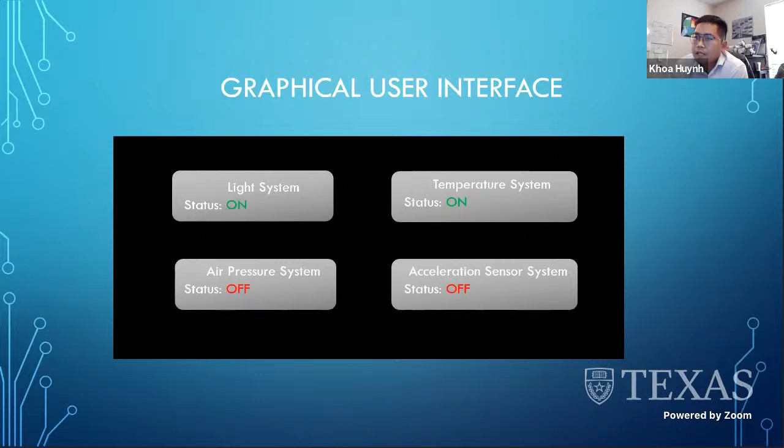Next slide will be my partner, Khoa. The graphical user interface is designed to monitor all the status for agent controllers, on and off.

We had a chance to put our design into a mock-up prototype. Here's our server, and around it are the agent controllers, and all the wires we run underneath, utilizing common connectors to plug in for all the same units.

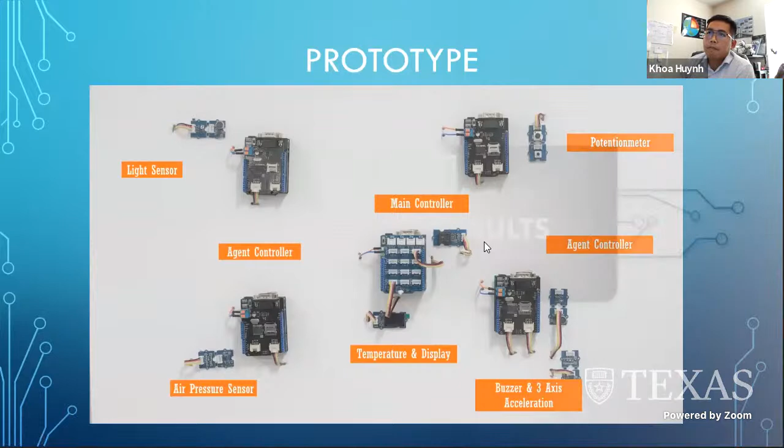Thank you, Khoa. Hello everyone, my name is V. Our preliminary experimental results were conducted by simulation on Tinkercad. The code was used to run the sensor system using an Arduino Uno R3 as the main controller, and the LCD screen showed the measurement from each application. The LED indication system is utilized to update the status by receiving data from the agent controller with green and red LED lights.

The first application is the temperature sensor system used to measure room temperature. The red LED illuminates at an average of 100 degrees Fahrenheit, and the green LED illuminates at an average of 75 degrees Fahrenheit, after 25 trial testing.

The air pressure application detects air quality and measures pressure levels. When the pressure is moderate or high, the green indication lights up, and when pressure is low, the red indicator turns on. The testing was repeated approximately 30 times.

The light-induced LED sensor system is used to measure light intensity, and the brightness level influences the LED indications. After around 25 attempts, whenever there is strong light intensity of 10, the green LED turns on, while the red LED indicates dim light.

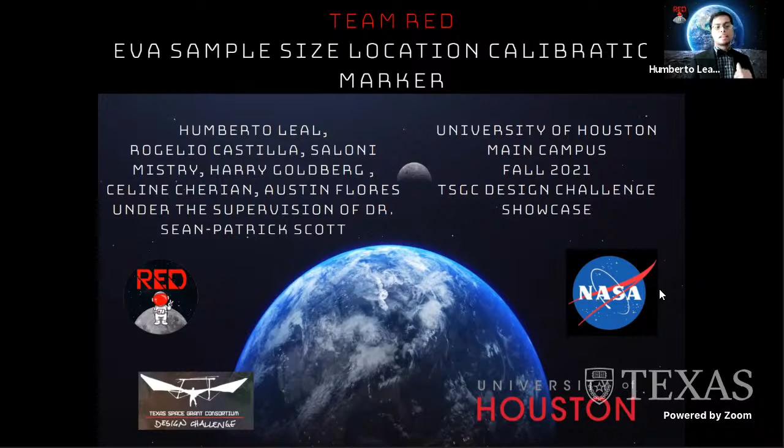In conjunction with Texas Space Grant Consortium, we're also participating in the NASA Micro-G NExT Challenge. We chose challenge number 1, the sample size location calibration marker. A little bit of background before we go into our design: NASA plans to go back to the moon in 2024 for the Artemis mission, and part of the mission is to get a better understanding of the lunar surface. In order to do this, they needed specific devices, and we chose to work on the sample size location marker.

Our design objectives, provided by NASA Micro-G NExT, are to design a sample marker for astronauts to deploy on the lunar surface. We want to focus on ease of use, since the astronauts have limited hand dexterity, so some motions with their hands are difficult. This device needs to emphasize ease of use; it cannot require any complex movement or anything like that.

Also, due to the pressurized suits, they are not able to bend down, so we need to make our device tall enough that once they place it on the ground, they don't bend too much or need to nail it all the way down. It also has to be light—sending things to space is expensive, and astronauts will be carrying it from time to time, so it needs to be lightweight.

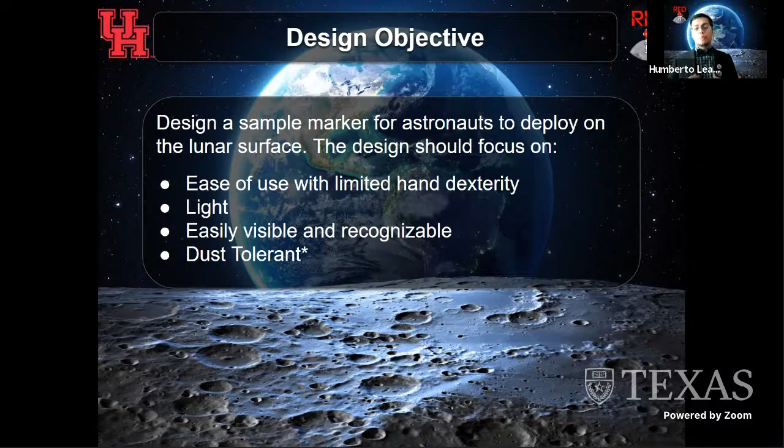Now that we know about the design specification and the background, let's talk about our journey through this process. So now we're going to talk about our preliminary designs for this idea, and then we're going to move on to our final idea.

The first design that we came up with was a combination between a camera lens and a coffee mug. We wanted to use the camera lens mechanism as a locking mechanism for the tripod legs to fall down, whilst also having coffee mug handles to hold the marker itself. One of the pros of this design was that it's safe and easy to use. However, we didn't end up picking this design because of the intricate locking mechanism and because it was less dust tolerant.

Moving on to the next design, our next design was the Origami Design. As with basically every design, one of our key considerations was meeting the volume restriction, being as small and compact as possible when stowed away and transported, but when in actual use, being as large as possible to help with moving it and picking it up without bending over too much. This really was the best solution for something that expanded to a very large size in relation to its collapsed size.

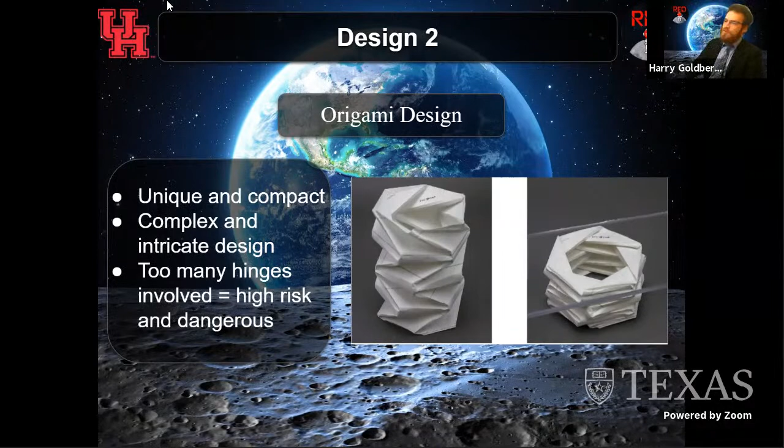Finally, we thought about the tripod design, also called the inverse umbrella. Some of the positive things about this is that we really appreciated the sturdy tripod structure. It's very good for multi-surface use and provides a sturdy structure to avoid deformation of any kind, while also keeping the marker up and providing a decent height.

The biggest change from the original NASA marker was that it had a locking mechanism to push the legs and make sure they stay locked in place to avoid wobbling. The issue was that it was very similar to the existing NASA marker, and our team's philosophy is that simplicity is key. We wanted to put ourselves in the boots of the astronaut, and to open it, the astronaut would have to untwist it using both hands, and to pick it up it just wouldn't be as simple as we could optimize it to be. So we didn't go with it, but we picked out some of the best things from it for our next iteration.

This is how we compared our designs. The mug and tripod designs were simple and safe from folds and sharp edges, but they were a bit similar to the current sample marker. The origami design is compact and easy to use, but the manufacturing process includes a complex hinge system, and the design has folds that could potentially trap fingers, though the folds have a big enough gap to not be considered pinch points. So based on our team's designs, we decided to combine the concepts of each to create SED, which is safe, compact, and easy to use.

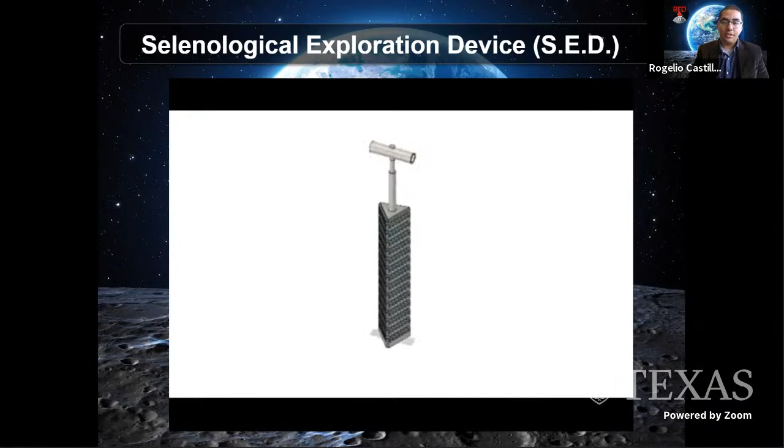Here is an animation of our SED device. As you can see, it only takes a simple twist to release the locking mechanism, which allows the legs to go up. The legs can move up to 35 degrees, ensured by our hinges. Again, it only takes a simple twist of the handle to lock it back into place.

I'll describe the SED device in more detail. Our name is actually Selenological Exploration Device, we call it SED for shortness. We really tried to go with the model that simplicity is key. We had a lot of ideas, especially origami, but the more complications there are, the more failure points, and it's not efficient for the astronaut.

Therefore, we tried to take the best points, such as a simple deployment mechanism. As you were able to see in the presentation, it only takes a twist of a handle, and the device would essentially release itself and almost double its size. It's very easy to deploy, and easy for the astronaut to pick up because it's already in a much bigger form.

So there is that locking mechanism, which is almost like a telescoping mechanism. When the handle is twisted, inside it just releases a simple lock that is hard to clog, which is able to expand the device. Also, it is able to stand on surfaces up to a 35-degree slope.

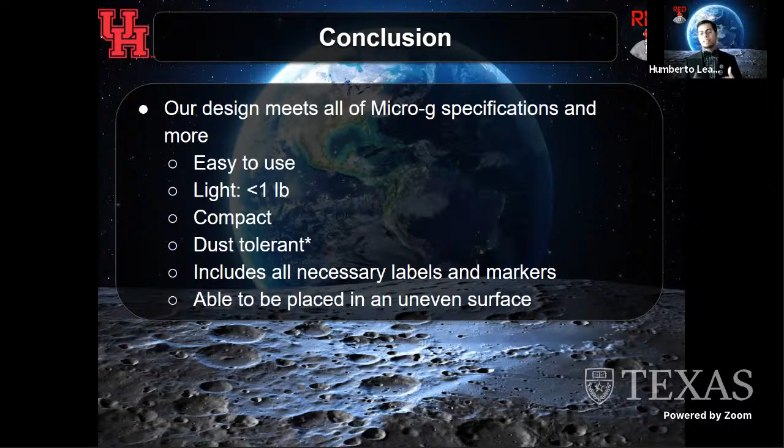For future work, we plan to 3D print the prototype and test it to see how dust tolerant it is and how stable it is on uneven surfaces. We calculated that it will be stable at a 35 degree angle, so we're going to put it at 35 and see if it's stable, and if it's double, why not.

As Rogelio mentioned, we're going to manufacture it out of aluminum 6061, which is the best compromise between weight and durability. Next semester, we're going to do a finite element analysis and stress testing to see if the measurements we took to reduce weight will sacrifice the integrity of the structure as a whole. Last but not least, we plan to do an outreach event in collaboration with SIVA STEM Academy to talk about the engineering process, and we're joining NASA.